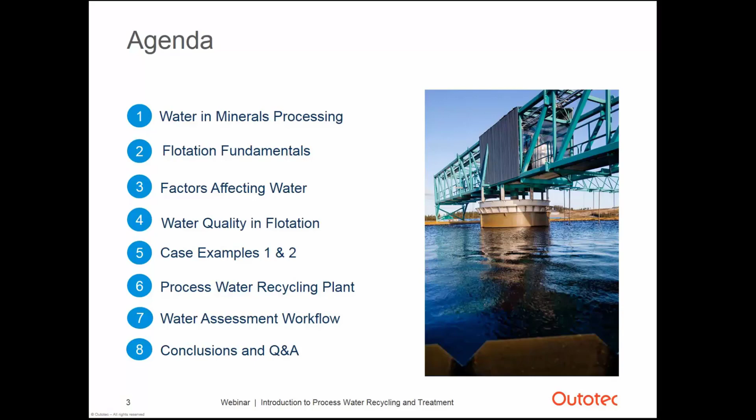Here we see the big picture where water is present in minerals processing. This is sort of a mine-site-wise approach of a picture. Apart from the process plant site, there are several water sources and flows within the site itself. This is a conventional tailings dam approach, where we are using conventional tailings management.

As you can see, a lot of water flows are around the tailings dam, because the tailings dam is the place where a lot of water is lost due to being bound to the tailings itself, released in evaporation or seepages. So in the case of a conventional tailings dam, more raw water is needed as an intake. So in order to secure the operation in the plant, some water storage would be good to have, for example the dam, as in this case, and also some process water reservoir.

The water from the tailings dam can be recycled back to use in the plant as process water, because the water quality is quite often at a good level. The other option is to discharge water to environment, which normally requires some water purification to follow the environmental regulation for the discharge. Of course, this depends on the site where we are.

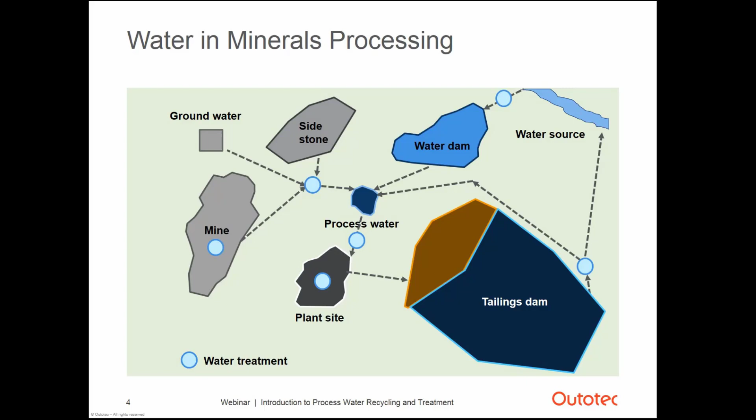Water is needed in several places in mineral processing plants. It has many functions. It is not just a medium for wet beneficiation, but it is also a very valuable resource. It can also be a cost item, especially in the water scarce, dry regions. So water needs to be considered as reagents with an OPEX associated with it, not just as a processing media. But most importantly, the quality of water will affect production efficiency and recovery.

Water is also connected to the whole hydrologic water cycle of the area and is impacted by weather conditions, where water evaporation and seepage in conventional tailings is a major concern. Water is also a source of risk, not only operational, but also environmental, could be reputational, for example, in the case of a tailings dam breach. There could be also some financial risks, for example, difficulties in getting insurances.

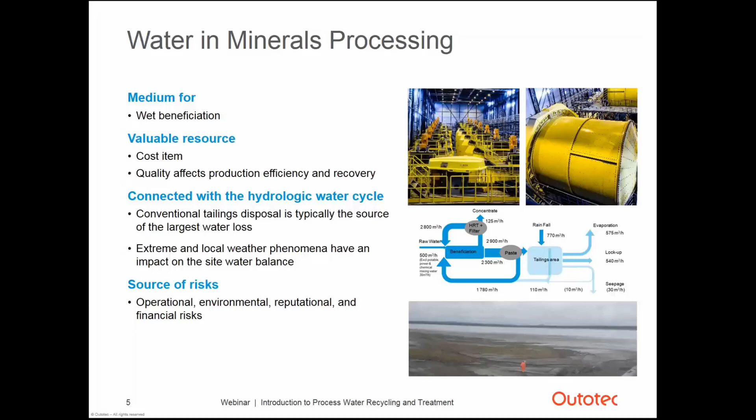This picture is looking more at the process level approach of the plant. This is a generic processing chain of mineral processing. As you can see, there are several water sources. You can see all the blue lines presenting water. From the water management point of view, the best idea for the processing plants is to treat the water in the specific unit processes and recycle water internally, instead of having large volumes of water to be treated in the end.

It is important to capture the water from the dewatering, especially important in water scarce areas. In order to have enough water available for processing, the best idea for saving the water is to recycle, where overflow of the clarifiers and thickeners are captured from the dewatering and put back to the process for use.

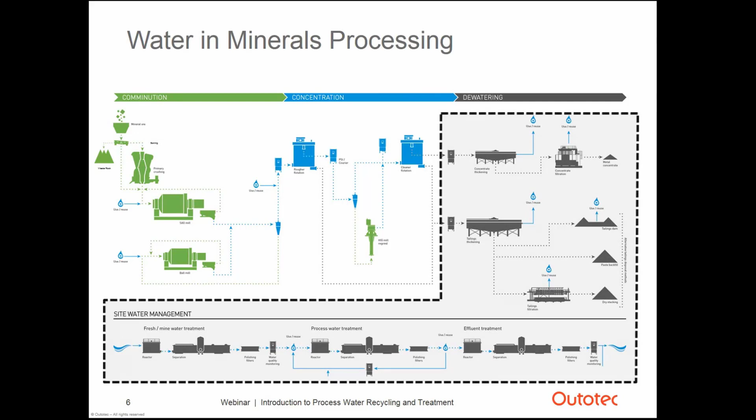Looking through some factors that are affecting mineral processing performance. One is, of course, the mineralogy of the ore. What is its chemistry, its crystal structure, and physical properties? In mineral processing, we need to know what is the composition on the mineral surface, also what is the floatability of other minerals on the particle, its grindability, etc.

Another factor affecting mineral processing performance is equipment, how we have dimensioned those, how we use those. Do we, for example, under or overgrind the concentrate? We know that some overgrinding of the ore easily produces fines in the process, and this can then disturb the process performance in the following separation processes in froth flotation.

The way we select the process chemicals affects the process performance. We know that there are differences between chemicals, how they work in cold temperatures. Of course, dosing affects as well. Then there can be some residual chemicals present in the recycled process waters that can have an impact on the process performance, and those need to be taken into account. Naturally, the way the plant is operated affects the performance, but also water has a significant impact on process performance, the quality and quantity of it.

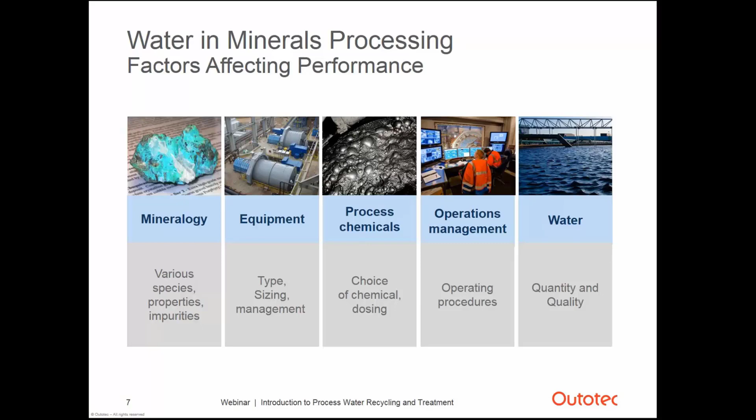So what is flotation? In brief, flotation is a separation method where the fine-grained minerals are separated from each other. The aim of flotation is to modify some of the surfaces so that the valuable part can be recovered in a concentrated form.

Apart from reverse flotation, the surfaces of valuable minerals are treated with chemicals so that they are hydrophobic and remain unwetted and will this way adhere to air bubbles. The valuable minerals are then lifted in a flotation cell where they enter the froth. The froth containing these particles can then be removed. Unwanted minerals that naturally resist wetting may be treated so that their surfaces will be wetted and they will sink.

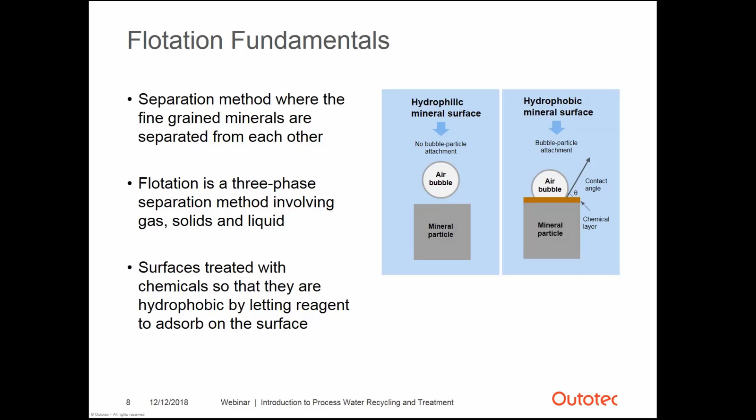So now going to the factors that are affecting water. One factor is the tailings management, or the way we are managing the tailings. In conventional tailings, the retention time can be 30 to 60 days, which allows some chemi-biological reactions in the tailings dam. Also, degradation, especially of organic molecules by UV radiation, is enabled. All this combined with long sedimentation time is expected to clean the water enough so that it can be reused in a processing plant.

Then when we start to recycle more water and turn more towards paste or even dry stack tailings, the retention times get shorter. It's typically around 4 to 8 hours. The reactions that were possible in the conventional tailings dam don't have time to take place, and impurities can start to accumulate in recycled process water.

Seasonal variations have their impact on water quality as well as the temperature changes. In lower temperature, kinetics gets lower, viscosity of froth increases. Quite often also consumption of chemicals is increased.

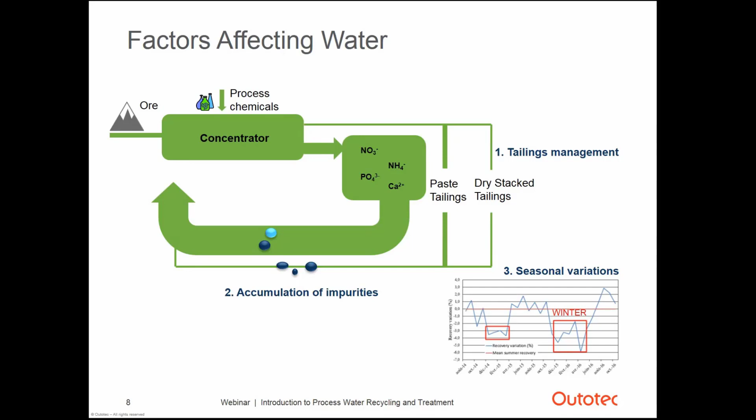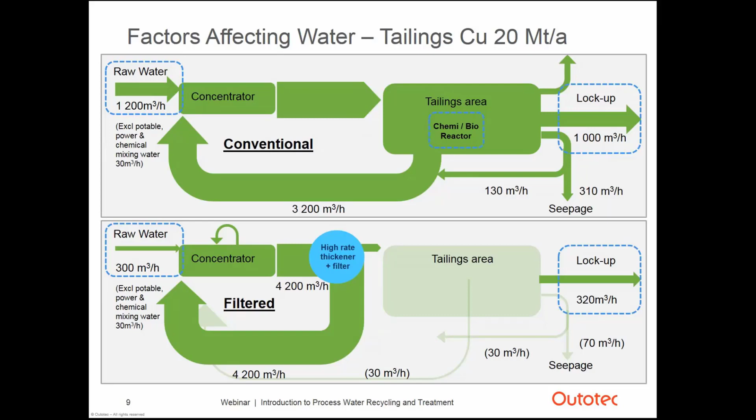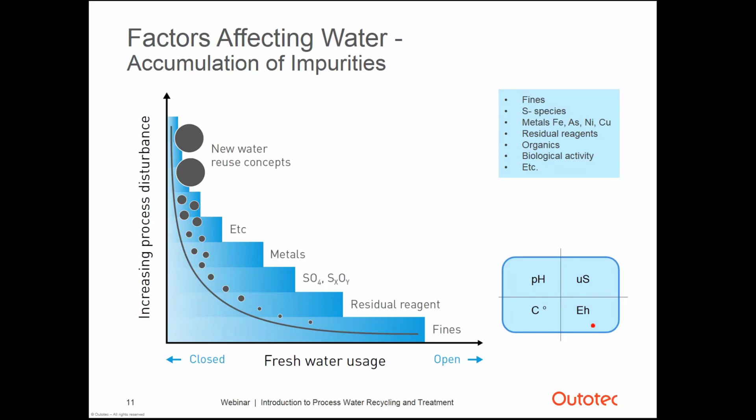Seasonal variations also have a significant impact on water quality as the temperature changes. Presence of humic substances in raw water changes depending on the time of the year. There are variations in microbiological activity depending on the circumstances, such as nutrition level, pH, and temperature in water. In low temperature, the dissolution of reagents is lower and their consumption increases.

Reagents as well as nitrogen compounds coming from explosives are food for the bacteria, and increase of these components in water accelerates microbiological activity. High microbiological activity can then be seen as algae blooming and slime formation, which can have a detrimental effect on the flotation process. Temperature and pH variations in the water have impact on the evaporation occurrence, as well as on the precipitation and dissolution rates of different components. In lower temperature, the flotation froth can overstabilize, causing problems in flotation.

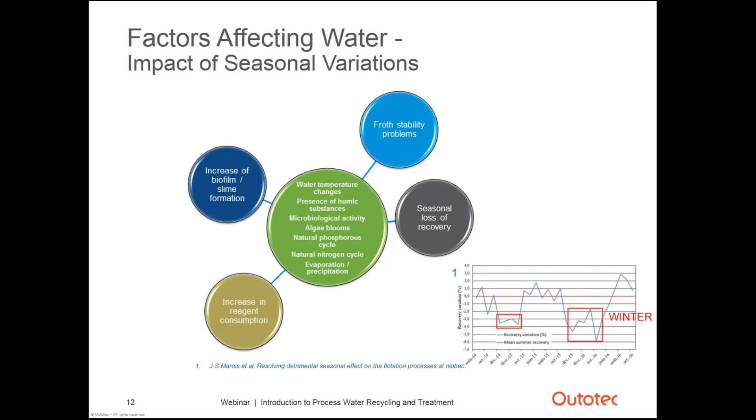You can see the graph on the bottom of the slide where you can see there's some differences in recovery between summer and winter. The recovery is much lower compared to summer. There are several components that can be accumulated in recycled process water and therefore harm the flotation performance. Here are the most critical ones: fines, ions, and residual reagents presented in these blue bubbles.

Firstly, fines. When we are talking about fines, we consider under 20 micron size of silicates, talc, clay, organic material. So what we know about the impact of fines in recycled water is that they have a large surface area, which increases flotation chemical consumption. Also, selectivity tends to decrease with the increase of fines. In some contents, fines with opposite surface potential will attach to valuable mineral surfaces and this way prevent collectors to attach.

About ions, we know that some ions can depress or adhere on the surface of valuable minerals and this way prevent adsorption of collector on the surface of mineral particles.

If the pH is favorable for precipitation, some ions may precipitate and disturb the flotation process. For example, gypsum formation between calcium and sulfate ions. Gypsum will precipitate on finely ground mineral, and this way block the site where the collector can attach.

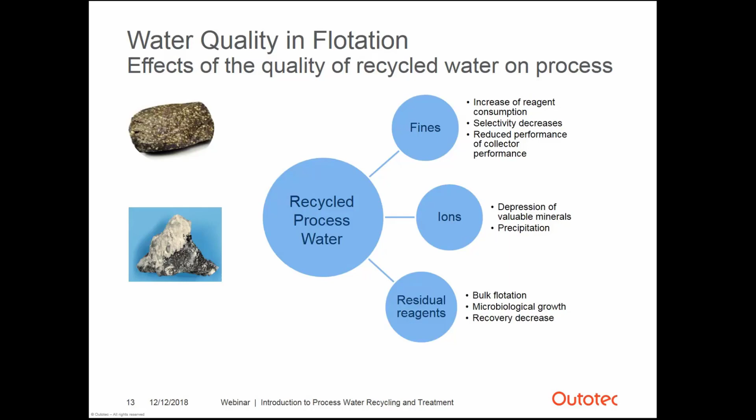Here we have a case example of studying the water quality impact of process water in nickel flotation. In this study, we performed flotation tests using 3 different quality waters: process water containing 10 ppm of a collector chemical called xanthate and 500 ppm of fines. Then the other water was treated, filtered process water, and as a reference also tap water was used.

As you see, the results show that the process water without any purification gave the lowest recovery, around 10% nickel recovery. It is the brown curve in the graph. Then when you look at the blue curve in the graph, it is the recovery curve of the treated water. We see that with the treated process water that had less fines, we achieved already about 17% nickel recovery. So there's a significant difference between the recoveries.

Well, naturally, tap water gave the best results, the green curve in the graph, but this graph just illustrates how water quality has an impact on the flotation recovery. And with a relatively simple water treatment, we achieved a significant recovery increase compared to the process water without any treatment.

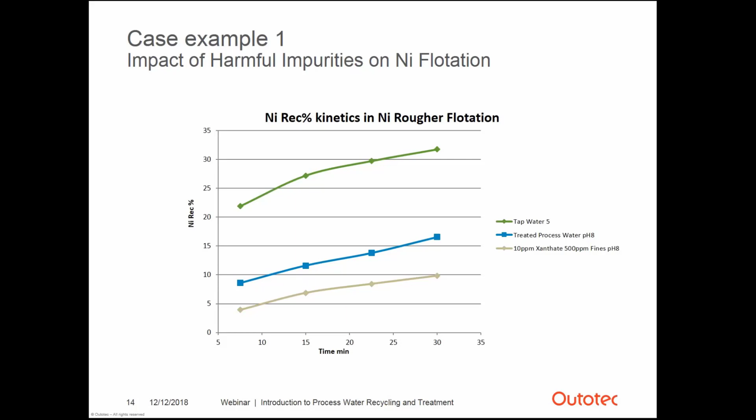Another case example here is from the study of a zinc flotation process, where some free cyanide affects the flotation performance negatively. Cyanide complexes the copper used as activator for zinc. And in addition to that, cyanide itself has a depressive effect on sulfide minerals. The used detoxification method is the iron cyanide precipitation process, which is made with ferrous sulfate. However, it has been observed that the detox process is not working well because free cyanide is found to be present in flotation waters still.

So in this study, several flotation tests with different water qualities were performed. The primary focus of the flotation tests was to improve zinc flotation by destroying cyanide. The results of the test work were clear. The current detoxification process doesn't perform well due to a low dosing rate of ferrous sulfate and high operating pH. The method of ferrous sulfate detoxification is recommended to be replaced by more efficient detoxification.

The red curve in the recovery and grade graphs shows the flotation results with the current detoxification process, having a recovery of about 81% and grade of 34%. The best zinc flotation results were achieved with complete cyanide destruction by strong oxidation with hydrogen peroxide, the curve presented in yellow. In the best zinc rougher flotation test, recovery was about 92% with a grade of 24% zinc. The required copper sulfate amount to float zinc was drastically reduced to 1/6 of its original amount after the process water was treated with hydrogen peroxide.

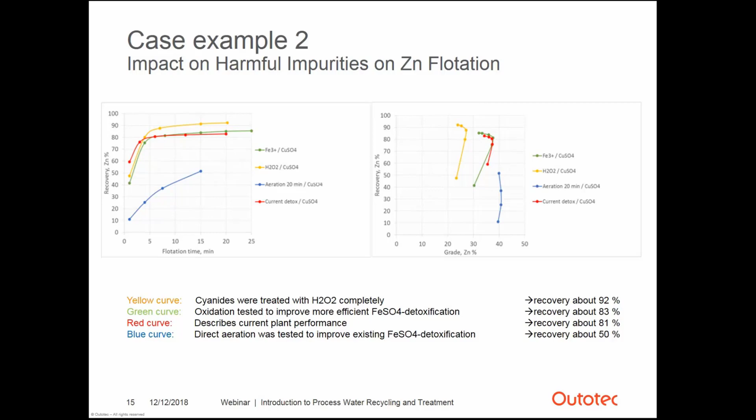Outotec process water recycling plant is our Outotec optimized solution to stabilize or even improve the process performance when the earlier mentioned accumulation of impurities, water seasonal changes, or the way tailings are managed are affecting the production. The process water recycling plant is mainly targeted for polymetallic, copper, gold, and iron reverse flotation concentrators.

It is especially targeted for concentrator plants where the tailings are dewatered and the concentrator's water usage is changing to short cycle water streams. For these concentrators that have dewatered tailings, this solution works as a kidney, removing the accumulated substances from disturbing the process performance.

This process water recycling plant consists of pre-designed and standard water treatment units for a wide range of volumes. The application-specific configuration of units depends on the water quality requirements and can be designed according to specific customer needs. But the main idea of the solution is to produce the right water quality, meaning good enough water to the right place. And then different water treatment units will be determined by the customer need.

Here you see a few units it could be consisting of. There's a microflotation unit for removing the main part of the solids, a precipitation unit for removing dissolved impurities, and polishing filtering for higher reduction of chemical residuals.

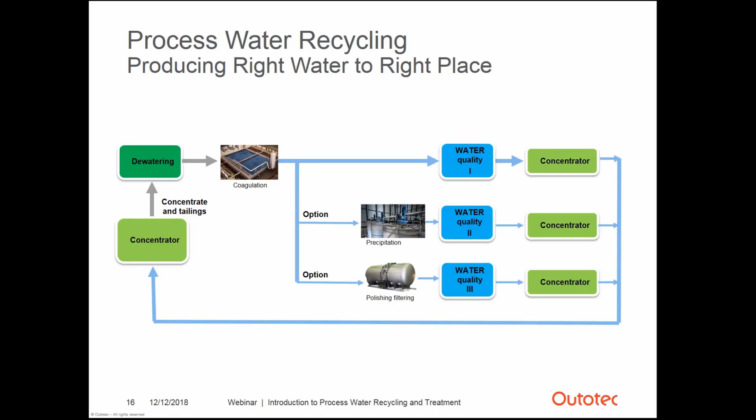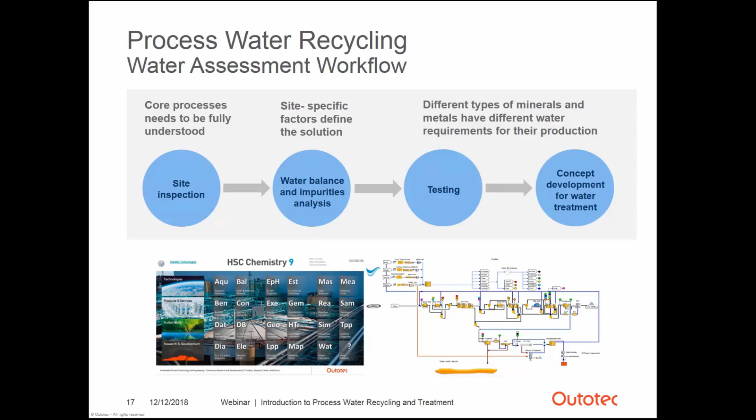And moving to conclusions. Water quality has a significant impact on process performance at mineral plants by affecting production efficiency and recovery. That is why it should be considered more as a reagent and not just as processing media. Outotec process water recycling plant is developed to meet these challenges related to process water quality and quantity by producing right quality process water and high and stable process performance. Our water monitoring tool, water quality and quantity management, and simulation tools are supporting the water management and treatment offering in the mineral processing field.